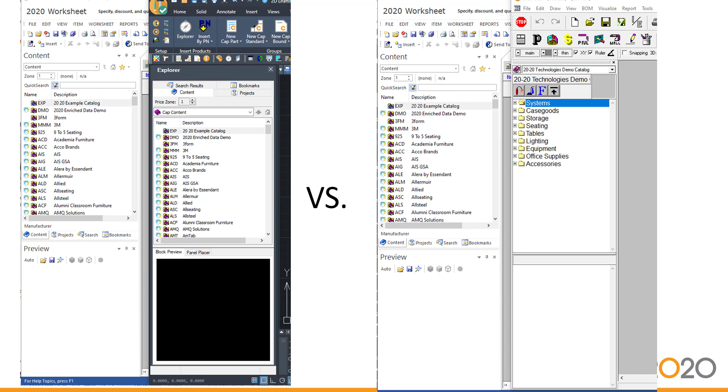One, CAP Complete's user interface is the same as Worksheet. The Explorer bar looks and functions the same in both programs, giving you a cohesive experience as a user. You can see here on the left side of the screen, I have 2020 Worksheet and 2020 Cap Complete both open side by side. You can see that the content tab is the same. The overall Explorer bar is the same, having the content tab, projects, search, and bookmarks. It also has a preview pane. So it's all the same.

Versus on the right-hand side of the screen, we have 2020 Worksheet open, of course, and then we have Giza. You can see there's a completely different look and feel and a difference in the way that the process works. Now, two, if you're an existing user of Giza, there is going to be no learning curve when it comes to using 2020 Worksheet and 2020 Visual Impression for the other parts of your project. That process is the same.

And three, Cap Complete has the ability to handle larger, more complex projects, not only from a software performance standpoint, but also from an organizational standpoint. This is a big one for me. For example, Cap Complete gives you the ability to break out different elements of your project in terms of outputting information. You have the ability to use multiple title blocks, moving and changing component tags, working with layers, all to help you communicate your design not only to your customer, but also to who I consider your greatest asset as a designer, an installer.

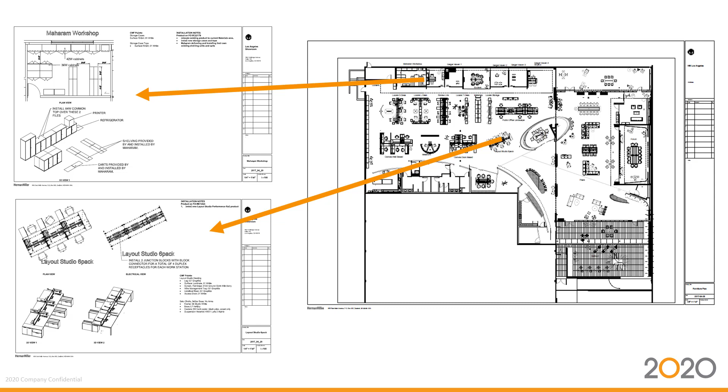And it does not require you to have additional product in your drawing like you would in Giza. You might have to copy the area outside of your floor plan in Giza to be able to pull together individual information about it. So it'd be like duplicating your work, whereas in Cap Complete, you're just viewing it in different ways. It's all just one complete specification. So those are some overall differences. Now let's look at a few individual differences.

Again, let me ask the question. Do you import DWG files for building shells that you might receive either from your client or from an A&D firm? If you're anything like me, yes, that happens quite often. Now, in Giza, unfortunately, there are at times issues with this, especially from a performance standpoint. One time I did a test on how long it took to import a DWG file into Giza versus Cap Complete. What took 18 minutes in Giza took about 2 in Cap Complete.

I was working with a student who had experience in AutoCAD. It was a new position for her, and they used Giza. We were going through training, and I tried to point out to her some of the differences between Cap Complete and Giza, to potentially promote to her team that switching over to Cap Complete from Giza would be to their advantage, especially from a performance and production standpoint in terms of your time as a designer. So I did this test, and I thought it would be fun for us to take a look for ourselves.

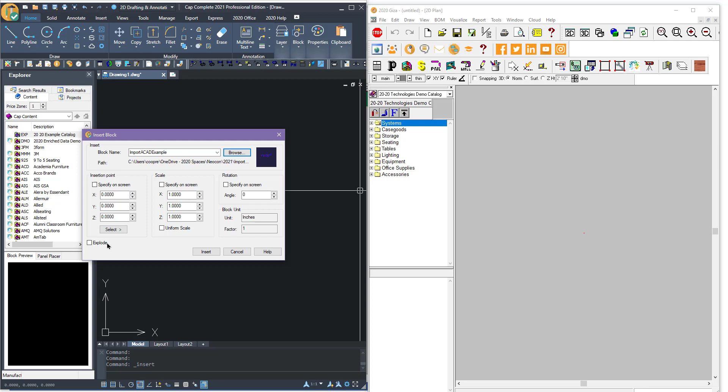Because if I do need to make a change to anything in there, like maybe the room name is going to be right where I want to place furniture, I can always go into that block and then update it in my actual furniture drawing. And so I'm not going to explode that. So I'm just going to say insert. And so we'll give it a minute. It won't even take that long. See, it's already done. And there it is. Okay, so I'll zoom in so you can see that.

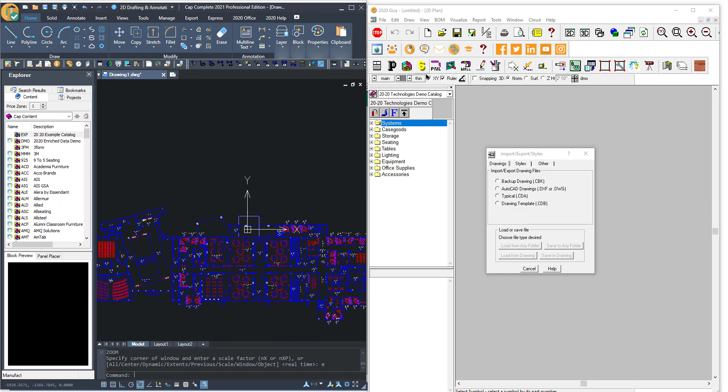All right. Now in doing that same floor plan in Giza, I'm going to go to File, Import, Export Styles. I'm going to import an AutoCAD. I'm going to go out and grab this. Same drawing. Now we do have some options to select from here, but I would keep everything as default. However, I would probably place my origin at the lower left extent. So I'm just going to click on that and say load.

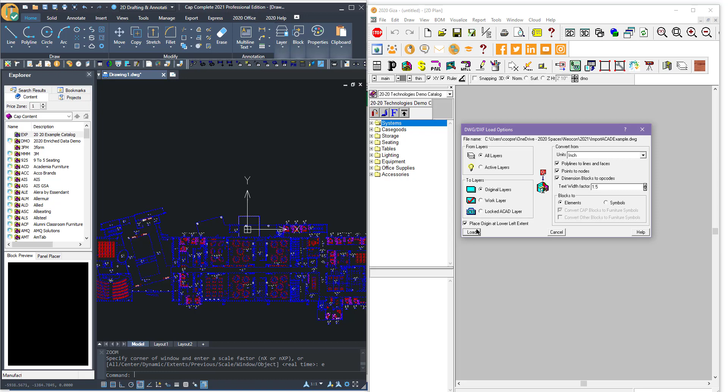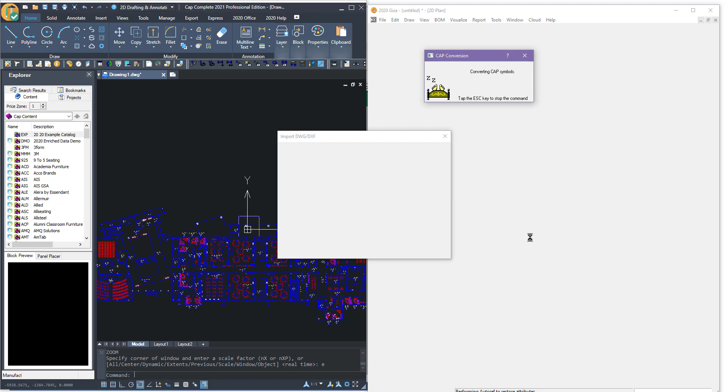And you can see it's going pretty quick, not as quick as Cap Complete, but it's chugging along here. And you'll see it's also going through this import process. It's detecting different types of things within our actual drawing. Now it looks like it's finishing up. Obviously, this is not going to take 18 minutes. This is not what I used when I did that example, but it went pretty quickly. And let me OK out of this.

But notice there are these large circles. And so sometimes during the conversion process, there are issues. Now, with Cap Complete, it is a DWG file format. And so when we're bringing in DWG files, there's typically never any issues. But when you're in Giza and you're bringing in a DWG file into a different file format, being the Giza file format, then there's potentially going to be some issues in terms of the translation.

And so this would be a little time consuming. You'd have to go in and delete out these circles and then check in there to see what else might have occurred in terms of the translation. So that's importing. And honestly, that is a big one for me because that is something that I do quite often. All right, moving on.

What about specials? Do you ever have specials in your projects, like a special size work surface? Or do you ever use custom items that are not in a manufacturer's catalog? Like maybe you have someone locally that manufactures something for you and you want to create custom items of those. Well, in both of them, you have the ability to create these. But in Cap Complete, it's much simpler to do this than it is in Giza.

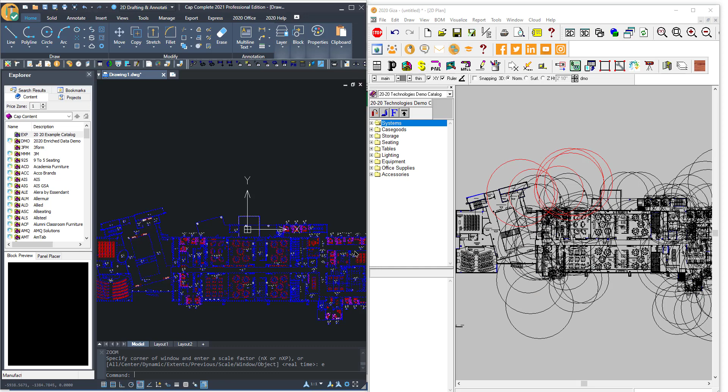Plus, you have the ability in Cap Complete to create what we call custom catalogs, where these items can be stored and then, of course, shared with other users. Now, these custom items are then also available to be used in Worksheet, because the platform is the same. So again, let's just look at an example. I have both programs open, and I'll just go ahead and open up a new drawing for each one. Turn off my grid here.

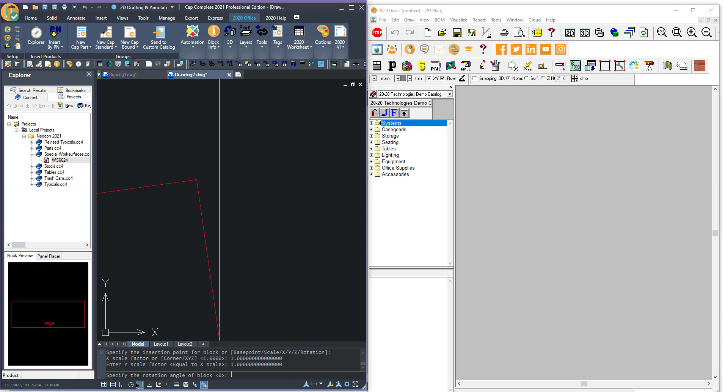Well, let me start by saying in Cap Complete, you have the ability to make what we call a new cap part. So that would be a special. And then once you go through that process, it's going to ask you to store it, and you're going to be storing it in what we call custom catalogs. And so here I have a Neocon 2021 folder, and then within there I have several things that I have called out as custom catalogs. And so for example, here I have one called special work surfaces, and then here I have this special size work surface that I created. And so then from here I can drag and drop this into my drawing.

And then of course in Giza, we have that same ability to create a special item. And when we do that, it is going to be stored in a manufacturer's catalog, actually called user. So there's mine. The product line is called library. And so once I open that up, again, here are some different specials that I have created.

And so again, here is that work surface that I've created in Giza. Okay, so they both offer that ability. I think it is simpler to do it in Cap Complete. We don't have time to go through the process of actually creating that.

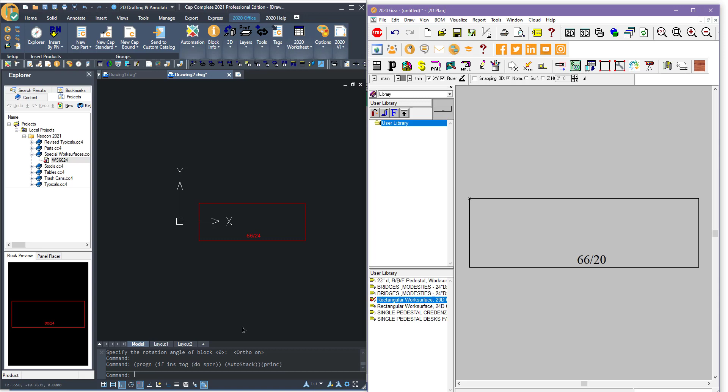You'll have to take my word for that. But the benefit of Cap Complete when you do have custom items is if you are in Worksheet, I can go to my same projects tab, and there are my same custom catalogs, and there's that work surface. So I can specify this either graphically or non-graphically.

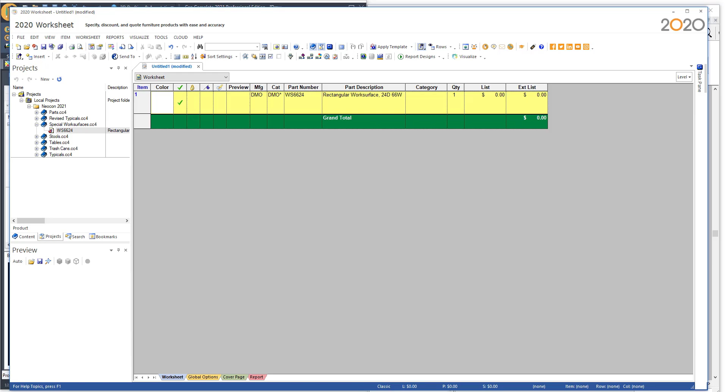That is an advantage and gives you a lot more flexibility. When you do take the time to create those special items, you want to be able to use them in any capacity. And last, do you ever use typicals, like the same private office or workstation configuration, over and over in a project? Giza does give you the ability to create a typical that can be shared from drawing to drawing, and so does Cap Complete, but Cap Complete takes it a step further.

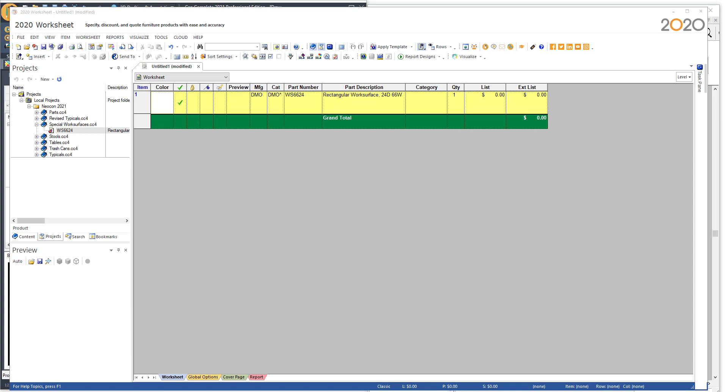It actually automates the typical. So if you need to make a change to that typical, it will then change all instances of that typical for you automatically. That's really called a CAP standard. If we go back into our different drawing platforms here, Cap Complete and Giza, I'm going to open up a new drawing.

And same with Giza. Now, I already have some typicals made. They're going to be stored in what we call a custom catalog. Down here, I have my typicals. I have a couple here. So there's a private office.

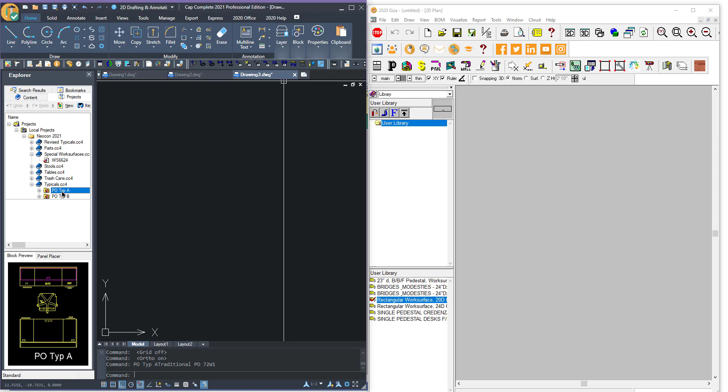And so there I can drag and drop this in. And there, that is a cap standard. And then as well in Giza, I can go in and bring in a typical that I've created, and we'll place that.

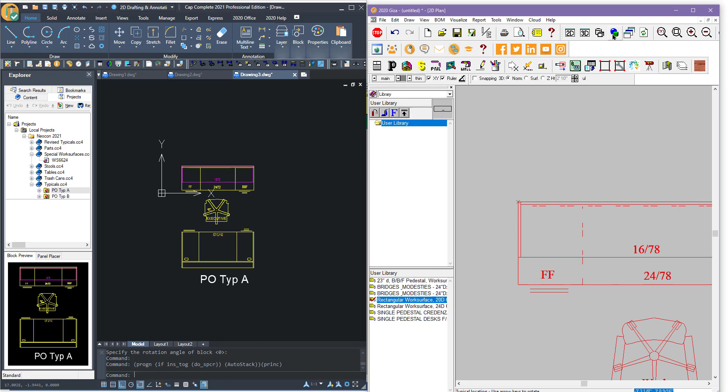Now again though, Cap Complete takes it a step further because I can automate this, or it is automated. I don't have to, it already is automated. So for example, let's say I've decided, oh, I want to take out the chair, or they just want a different chair. So what I can do is I can come in here and go into my cap standard, and I have some options. I'm going to undo my cap standard.

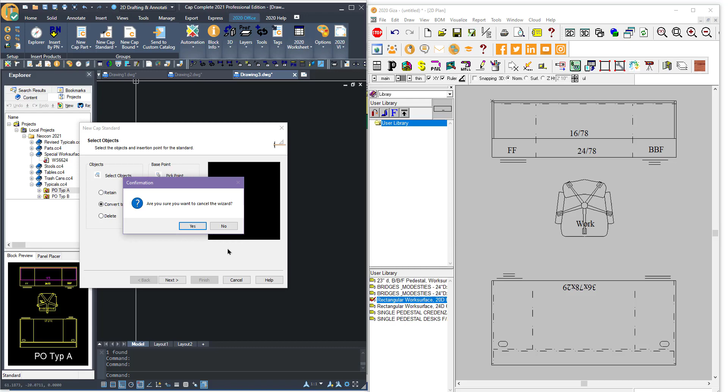So now it's just kind of individual components. I can do what I need to do. I'm going to delete my chair. But then if I go in and make a new one overriding the old, it will update all instances of that. Oops, I forgot to copy that so you can see that.

So let's make use of our undo here. Of course, both programs have that, so not anything to be concerned about. That's helpful. So let's go back and I'm just going to undo. And it doesn't matter which one you undo out of the ones that you have in your drawing, it can be any of them.

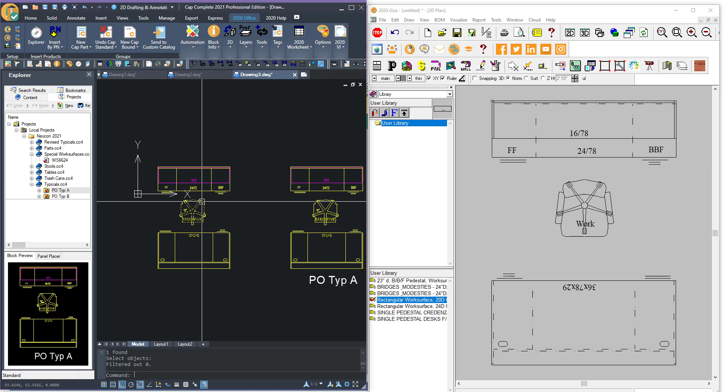And then I'm going to go in and make a new one, and I'm basically just going to overwrite the old name. I want to be consistent though in everything that I pick in terms of components and my base point. I'm going through this very quickly. We don't really have time to talk about how to do this in detail. But here it's going to bring me a list of the ones that are in my drawing. So there it is, and I'm just going to say next.

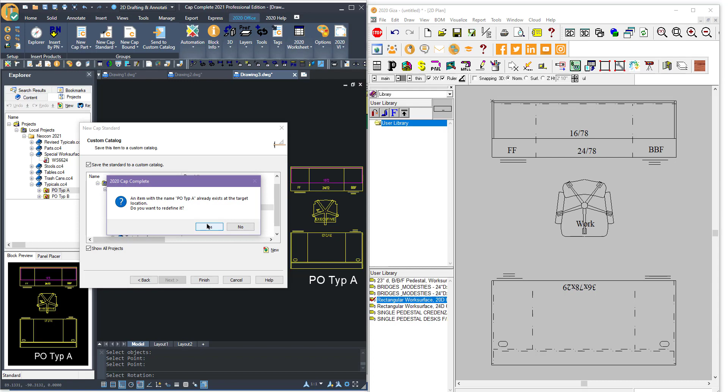And it's going to ask me to store it someplace. I'm actually going to store it in a different custom catalog so I don't overwrite my current one. I've done that a couple times here, so I'll just say finish. Do I want to overwrite it? Yes. And there it is. It's automated. Great tool. Love it.

Those are probably the big ones for me in terms of why I would choose Cap Complete over Giza. Again, most of us already have experience with AutoCAD. And so if you're not already considering Cap Complete, I hope this is helping you determine which application is going to be right for you.

And again, the best part is that the learning curve is very manageable. Because again, most of us already have experience with AutoCAD, and if we're already a 2020 user, we already are versed in worksheet and visual impression.